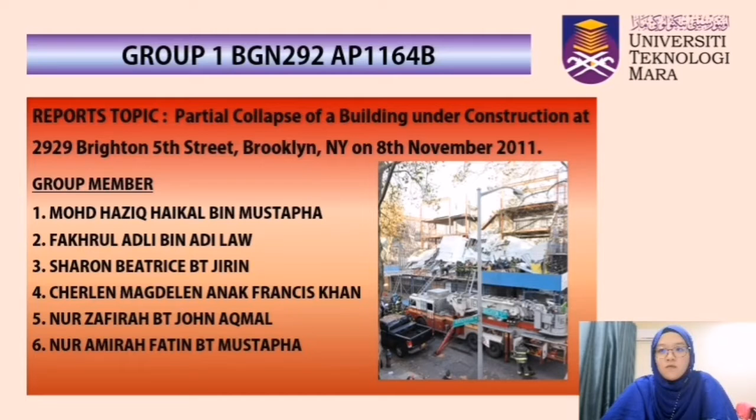Assalamualaikum warahmatullahi wabarakatuh. My name is Nur Zafirah binti John Aqmal. I will present about the case elaboration of the collapse of a building at Brooklyn, New York. The building collapsed while under construction because of failing to maintain the stability of the structure.

All the joints at the 3rd, 4th, and 5th floor of the front bay were hinged and had limited flexure stiffness. Also, the front bay split from the center of the structure due to the overload.

Next, the building itself showed poor quality, which easily contributed to the collapse. Lastly, other than misconduct of the standard operating procedures and contract drawings, the contractor also failed to produce the detailed drawing of the building, including shops, structural steel, metal decks, C-joists, and reinforcing steel.

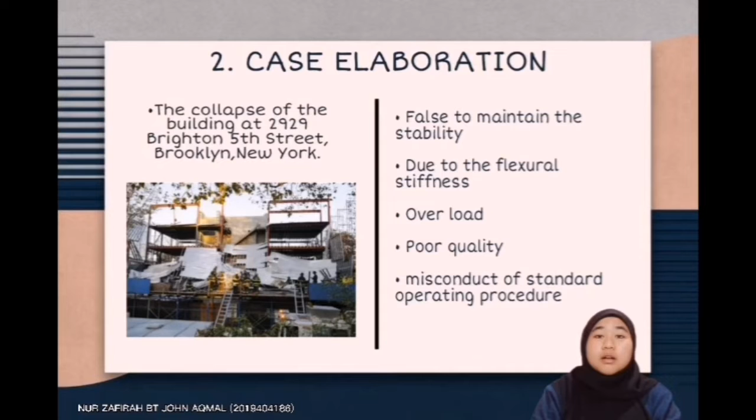Hi everyone, my name is Sharon Beatrice binti Jirin. I will continue on this topic of case elaboration. Based on the photo above, it shows the destruction of the front bay, which resulted in the death of a worker and some injured workers.

To be exact, a few hours before the accident, the concrete had been poured onto the 4th floor. Despite seeing the floor swaying unsteadily, the workers did not alert the superiors or take action because they realized it did not bring difficulty to the work.

However, when they proceeded to pump the concrete onto the 3rd floor, the weight of the floor above increased the pressure. This shows the team's failure in communicating well with the engineers and not following the drawing properly.

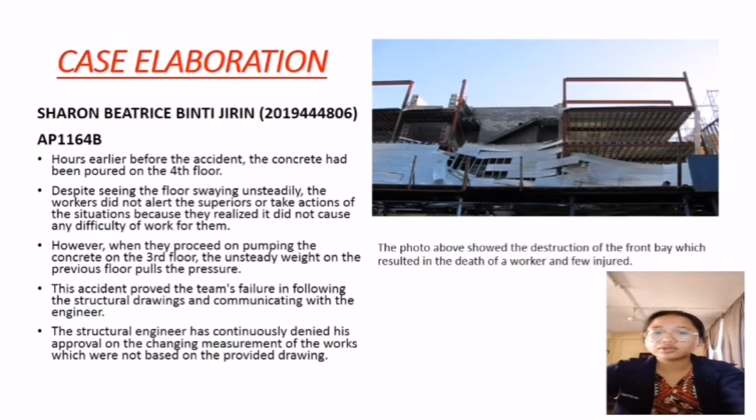The structural engineer had repeatedly denied his approval on the change of measurement for the works involved, which did not follow the original drawings.

Next, the investigation of the accident found that the securing of the metal decks to the C-joists was mostly done using nails instead of screws for most of the location. This lack of proper materials and tool usage, and how it affects the stability of a structure, caused the death and injuries of the workers.

From the very start, there were already some issues that were not addressed between the structural engineer and the contractor. The structural engineer was worried about the sewer line crossing the property below the foundation level. There were already questions raised at the time of his visit about the pouring of the foundation regarding the helical piles.

A telephone pole existed in the middle of the structure, which was left as it was and the structure was erected around it. The structural engineer also objected about the telephone pole but was ignored.

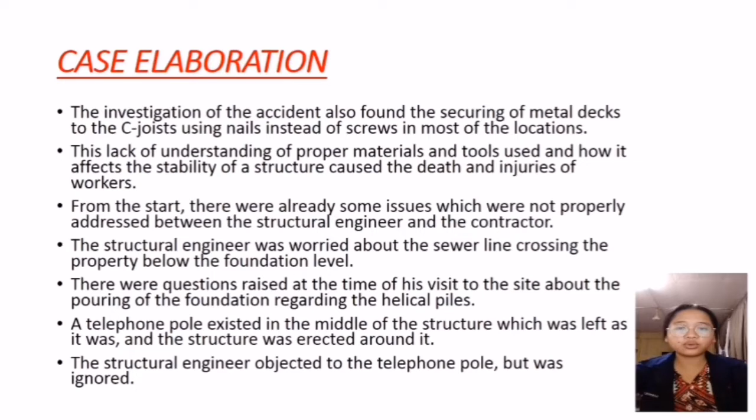Therefore, we can conclude from this case elaboration that the contractor has to refer again and again to the drawings, have proper communication with the structural engineer, and seek consultation or confirmation before proceeding with the work. To get a job done nicely should include overall safety, precaution, approval, and proper guidelines to avoid deadly matters.

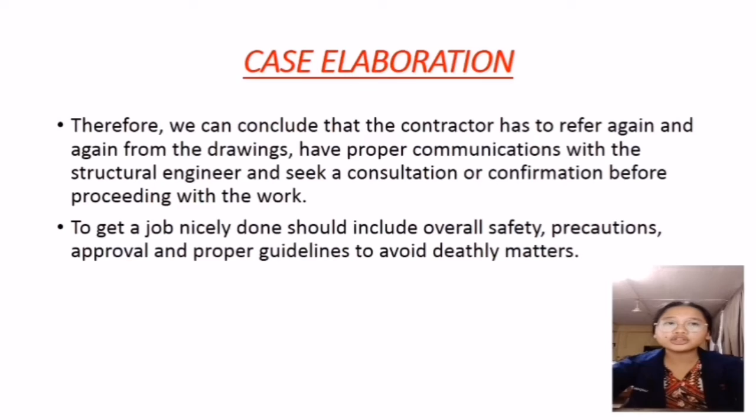Assalamualaikum. My name is Muhammad Haziq Haikal bin Mustapha, and I will be presenting about the possible causes of the incident that occurred at Brighton, Brooklyn of New York. There are 4 possible causes that may be the reason for the death of a worker and the 4 other workers being injured.

The first main mistake is due to failing to maintain the stability of the structure. The structure of the building was not as strong in stability as it should be because all the joints of the front bay at the third, fourth, and fifth floor on the west side were found hinged. Even these small things should have been taken seriously to avoid any unwanted things from happening.

The next one is that the quality of the construction is very poor, which highly contributed to the collapse of the building. The construction site should have been clear of any unwanted structures such as vegetation and debris. In this case, there is a telephone pole standing in the middle of the building, placed around the concrete floor. This also should have been taken seriously enough to avoid any unexpected things happening at the work site.

Besides that, the plans were not followed as planned and not under schedule. The work at the construction site should have been followed as planned, but the construction at the place where the accident happened did not follow the schedule as it should. For example, the workers started to pour the concrete despite the concrete works not being planned on the day of the building collapse. It should have been followed as scheduled because the schedule was managed perfectly to ensure the quality of the work is at its best and not done in a hurry.

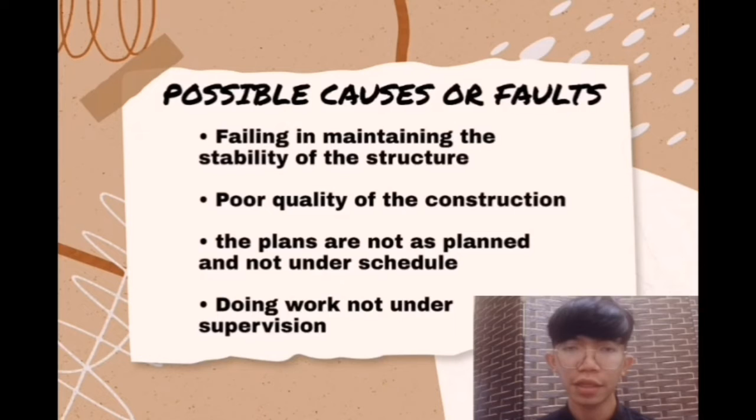The contractor is the one who is fully responsible for everything that happened at the site, such as methods, supervising, planning, executing, leading, and inspecting the construction. But from what we see, the contractor is not doing his job well enough as we caught a lot of mistakes, and it has affected the quality of the construction to be very poor.

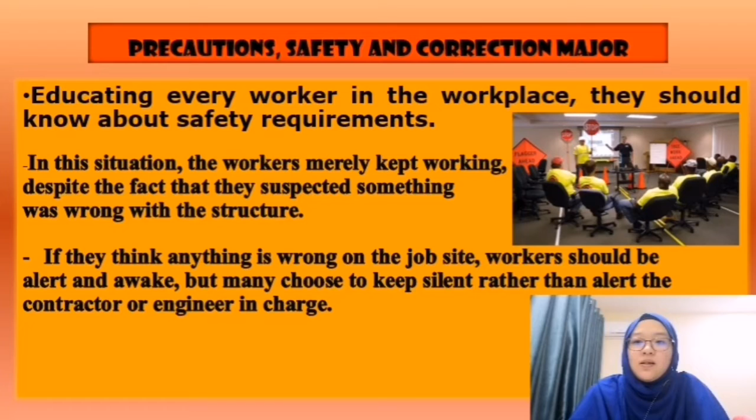Always keep the communication lines open between the contractor and the engineer. In this scenario, the contractor should be made responsible for the building collapsing since he made the decision without consulting the structural expert, the engineer. The contractor claimed by himself that the structural engineer approved the change, but the structural engineer denied this. Without any understanding of structural design, the contractor should not take a shortcut to accomplish the buildings.

For instance, the contractor made a mistake at some location where nails were used to secure the metal deck to the C-joist instead of screws, and then the contractor substituted exterior heavier studs on the second and third floor with lighter studs, 16 gauge instead of the specified 14 gauge as indicated on the structural drawing by the structural engineer.

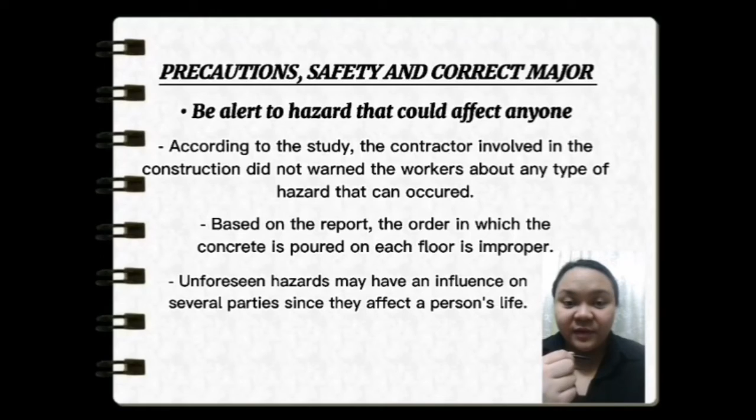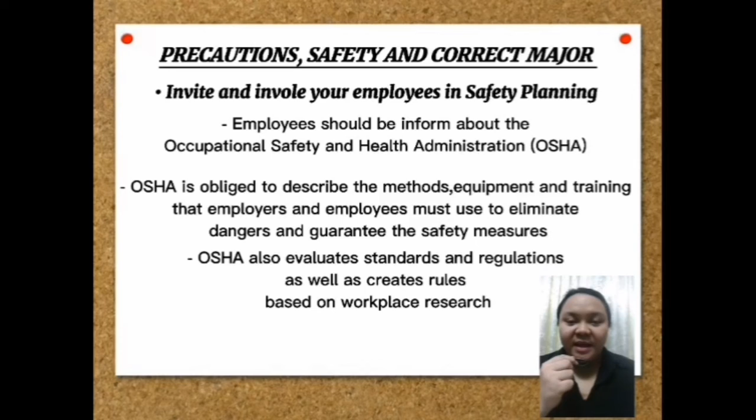OSHA also provided training and resources to companies and workers to help them comply with its rules and regulations. Besides, OSHA is obligated to describe the methods, equipment, and training that employers and employees must use to eliminate danger and guarantee safety measures. Thank you.